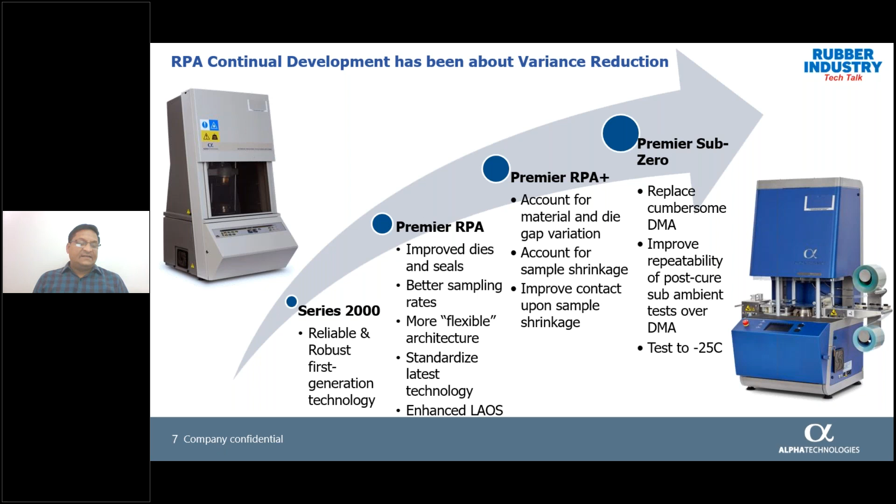Now, the present launch is the Premier Sub-Zero, which is aimed to replace the cumbersome DMA and improve repeatability of post-cure sub-ambient tests over DMA. In the Sub-Zero, one can test up to negative 25 degrees centigrade.

The need for developing sub-zero technology is to give a testing solution for shop floor rubber compound to fulfill the stringent tire labeling requirement. Nowadays, around the globe, most countries are imposing tire labeling requirements. Europe was the first to implement tire labeling, and all tire manufacturers supplying tires to Europe are doing tire labeling in terms of traction and rolling resistance.

The second need is to reduce cycle time to submit test tires to OEM, since developing a tread rubber compound and submitting a test tire to OEM requires so much testing and processing - namely mixing, sample molding, testing in DMA, processing in shop floor, and then submitting a test tire to OEM.

With the help of RPA Sub-Zero, we are able to reduce the test time after mixing of the rubber compound to hardly 25 minutes, while DMA testing takes a minimum of 24 hours.

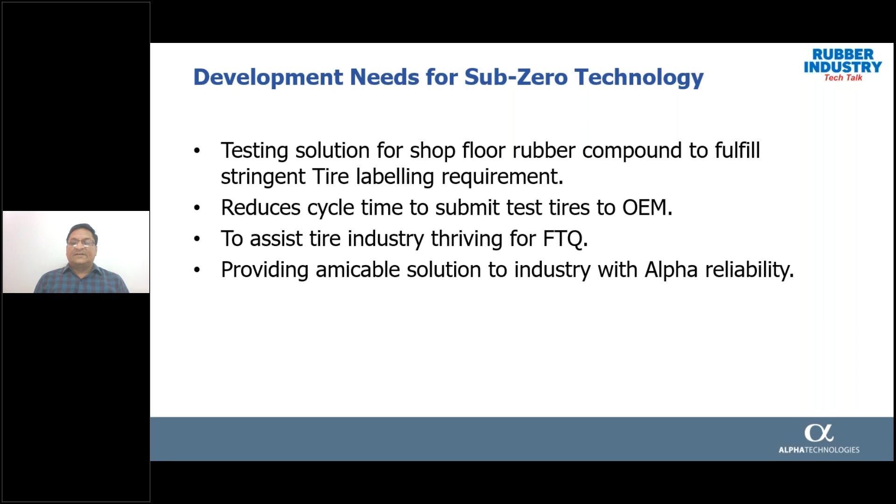This is aimed to assist the tire industry thriving for first-time quality, and we wish to provide an amicable solution to industry with Alpha reliability. The focus of the development was to give the industry a solution with only one test to qualify rubber compound processing, qualify the cure properties, and indicate tire performance properties inside the laboratory.

For example, for wet traction, one can have predictor testing at 0 plus minus 10 degrees centigrade. For dry traction, it is at 20 plus minus 10 degrees centigrade, and for rolling resistance it is 60 plus minus 10 degrees centigrade.

A second focus of the development was liquid nitrogen-free cooling. This ensures the safety of laboratory personnel. The third focus was determination of real-time data based on actual shape factor, as I already explained - we are using the thickness of the rubber sample at the test temperature.

And last but not least, the most important point, is to bridge the gap between shop floor mixed and R&D developed rubber compound data.

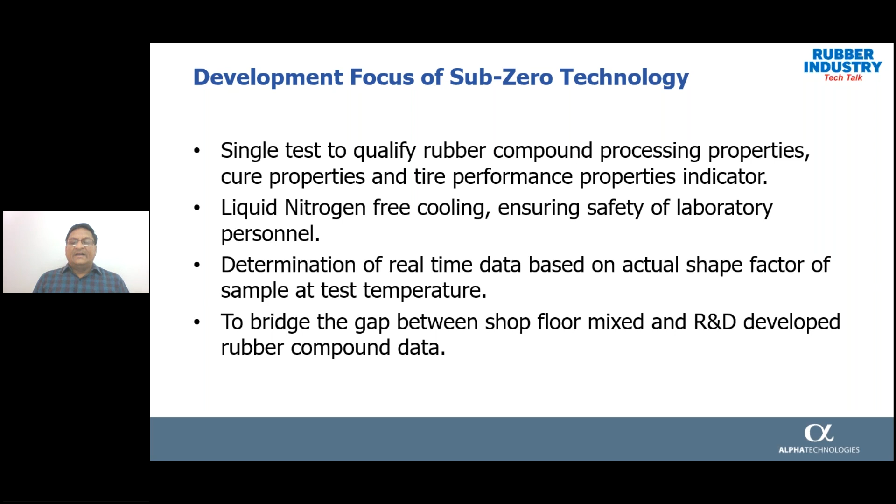How this technology works: we have compressed air supply from one end, then dryers, oil separators, followed by the chilling unit, and the chilled air is passed through the dies. With the help of this, we can reduce the temperature of the RPA dies to negative 25 degrees centigrade, which significantly reduces the in-process testing time.

This RPA SZ is your one and only rheometer that eliminates the need for a DMA tester. This is the one solution - all you need to test the processability, cure characteristics, and tire performance laboratory indicator in a single test using the same rubber sample, with lower capital spending.

On the right hand side, you can see the two graphs. The blue one is from the DMA, while the green one is from RPA, and the tan delta is higher. This is because in DMA, in the tension compression mode, people give some static strain plus dynamic strain, while in RPA you can give only dynamic strain. So there is a difference in strain values, due to which the RPA tan delta is higher, but it is consistently higher for almost all the rubber compounds that we have tested.

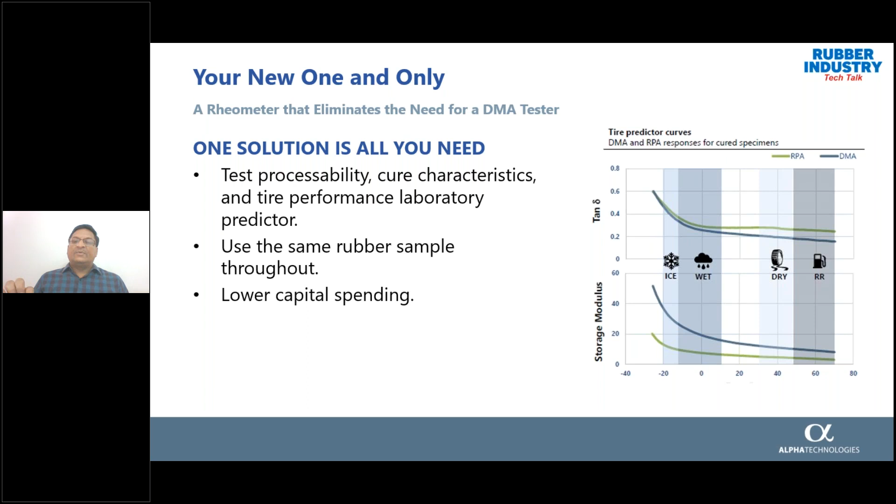On the ground of specification, you can see the frequency is from 0.0016 to 50 hertz, then strain 0.07% to 1255%. Then the temperature is the most critical thing, that is negative 25 to 230 degrees centigrade.

The maximum temperature ramp rate above room temperature is 1 degree centigrade per second, and the maximum die cooling rate above room temperature is 0.5 degree centigrade per second.

You can see here the rate of sub-ambient cooling, meaning at what rate we are going from high temperature to negative 25 degrees centigrade. From 60 degrees to 30 degrees centigrade we are reducing the temperature at a rate of negative 7.5 degrees centigrade, while from 30 degree to 0 degree we are cooling down the die at a rate of negative 5.5 degrees centigrade per minute, and from 0 to negative 25 degrees centigrade we are reducing the die temperature at a rate of negative 2.5 degrees centigrade per minute.

So with the help of this very controlled cooling rate, we are obtaining temperature stability at negative 25 degrees centigrade of plus or minus 0.2 degrees centigrade.

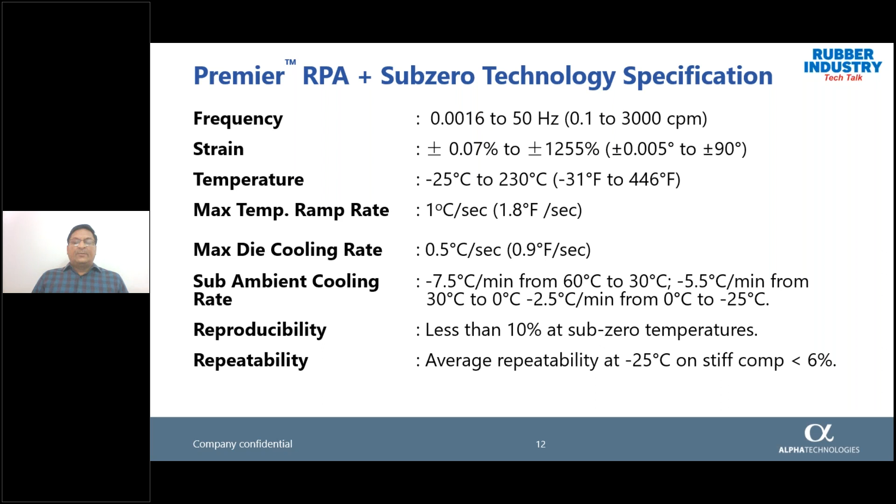You can see the data reproducibility is less than 10% at sub-zero temperature, and the repeatability is less than 6% on stiff compound at negative 25 degrees centigrade. So our repeatability is really good, as well as the reproducibility is very good, excellent.

Then the torque range is 0.01 to 225 decinewton meter, and the measured data is torque, temperature, frequency, strain, while all others are calculated data, that is the modulus component, the compliance component, the torque, the tan delta, then the viscosity and the complex and the real and imaginary viscosity. And the data storage is SQL database.

RPA meets the testing standards of ASTM D1053, D5289, D6048, D6204, D6601, D7050, D7605, and D8059.

Now we will discuss the PDM technology, that is for Precision Dynamic Modulus determination. This technology is basically introduced into the Premier RPA Plus to compensate for the sample shrinkage due to lowering of the temperature from the actual curing temperature of the rubber sample.

With the help of this technology, we are able to maintain a constant die pressure, and we are actively controlling the pressure, and monitoring the change in thickness of the sample, and we are using the actual thickness of the sample at test temperature into modulus calculation.

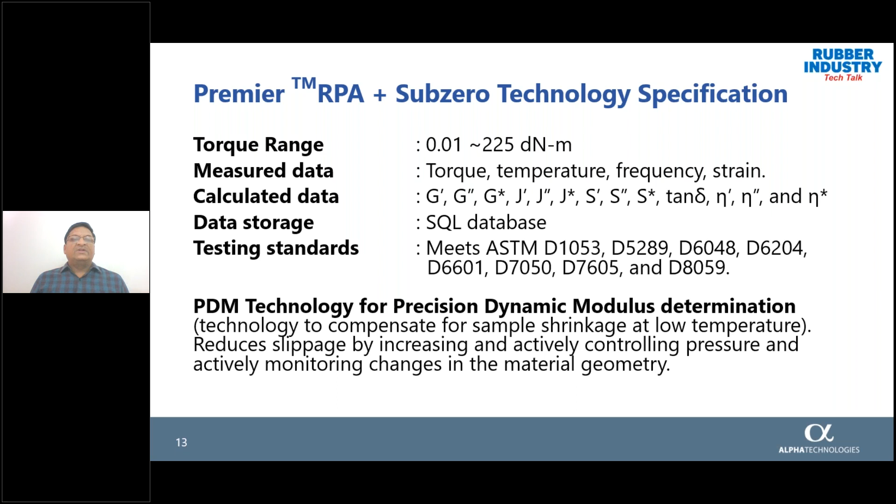This basically helped us in improved accuracy. This helped us in improving the accuracy of rubber product properties, that leads to safer products at a lower cost.

Now you can see here for the cured SBR sample, the coefficient of variance has been reduced by 49%, while for uncured SBR on storage modulus, the coefficient of variation has been reduced by 81%.

On the right hand side, you can see here the data accuracy and precision has improved, while the range of the specification is reduced to a large extent. In the storage modulus for cured SBR compound, again the span of the specification has reduced, while the accuracy and precision is being improved.

So in the PDM technology, we are using the real shape factor. This gives us the most accurate rheological data in the world.

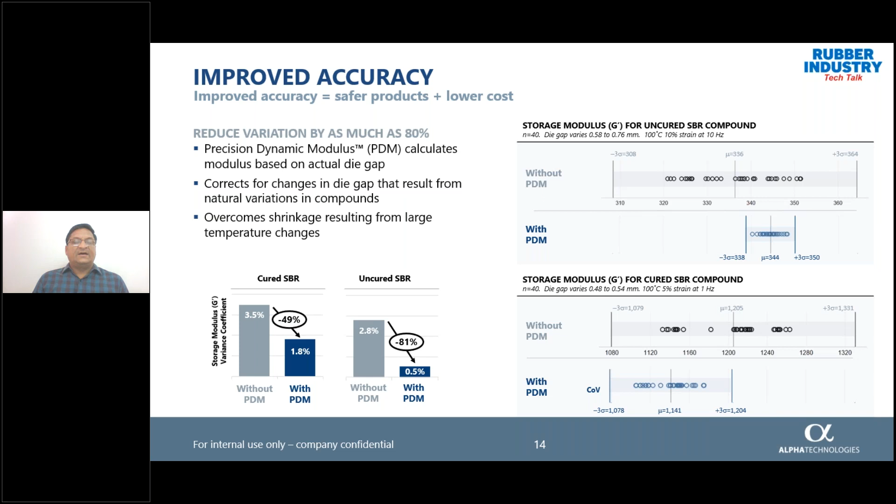And the way forward for the development of our instrument is, we will definitely continue to strive for further improving our process, then product and its performance.